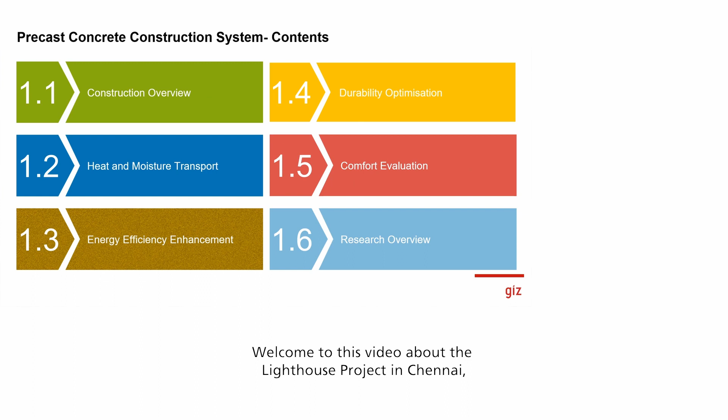Welcome to this video about the Lighthouse project at Chennai, where we discuss the energy efficiency enhancement measurements for the precast concrete construction system. I will show you some background about energy efficiency itself, go deeper into energy demand balancing, and show you the steps to reducing the energy demand in that special construction.

I would like to start with the first step, the basics of energy efficiency in buildings. The core basic is the definition of efficiency. What is efficiency and what are we looking at? One common definition is: achieving the best possible benefit with the least possible effort.

In the building context, we use some principles of energy efficiency in building design, which you can see on the right-hand side in this graph. In the red squares, you can see different climate areas, from the Arctic over the Mediterranean, hot and humid, hot, and outer space.

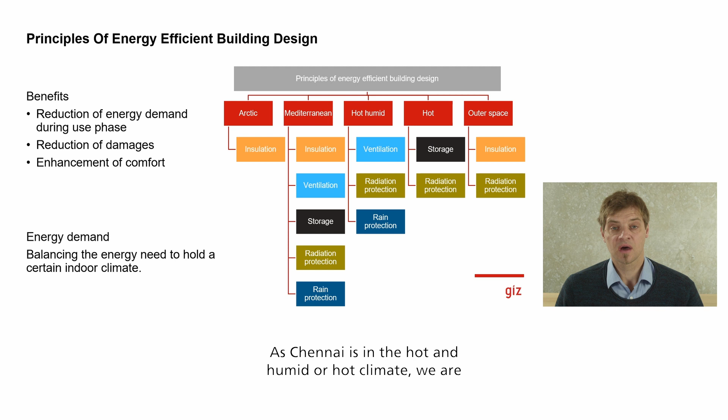As Chennai is in the hot, humid climate, we are looking firstly at these aspects. Firstly, I say, because it's not just this—it could also be other aspects, for example insulation or radiation protection as mentioned before.

By doing that, we try to gather the benefits coming out of the energy efficiency measures we have. First of all, it's the reduction of energy demand during the use phase. We will reduce the energy demand for the building to enhance or stay within the same comfort level.

This could also lead to an enhancement of the comfort level, as you can see in the benefits on the left-hand side, covered in another video. This mostly also leads into the reduction of damages, which is also covered in another video.

So in this video, we are going into the reduction of the energy demand during the use phase, which means we have to look into the energy demand. So what is energy demand?

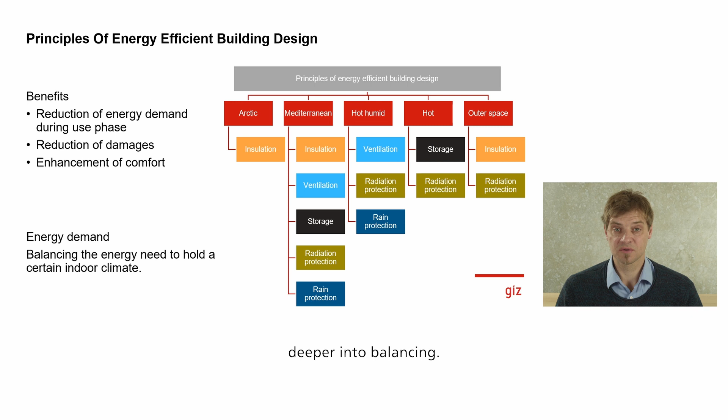The energy demand is the balancing of the energy needed to hold a certain indoor climate. So the indoor climate is fixed, and we would like to reduce the energy we need in order to hold that indoor climate. We have to look deeper into balancing—what is balancing and how do we balance the energy demand for a building?

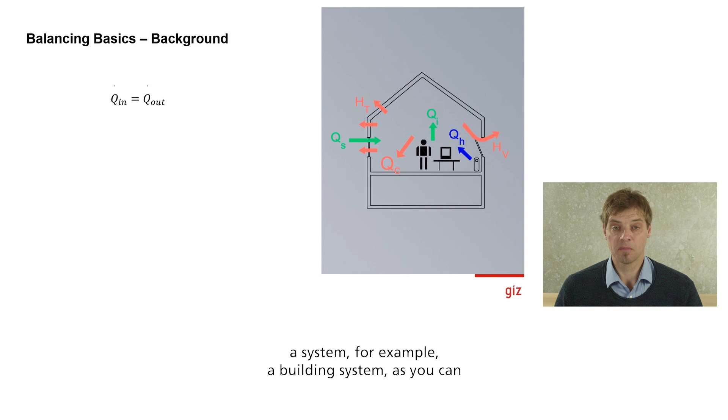We can do that in different ways, and the simplest way is what I have brought to you, so you can use that in your day-to-day work. The balancing background is always that we look at a system, for example a building system, as you can see on the right-hand side, and we balance all the incoming energy, all the sources, with all the outgoing energy, all the sinks, as we call them.

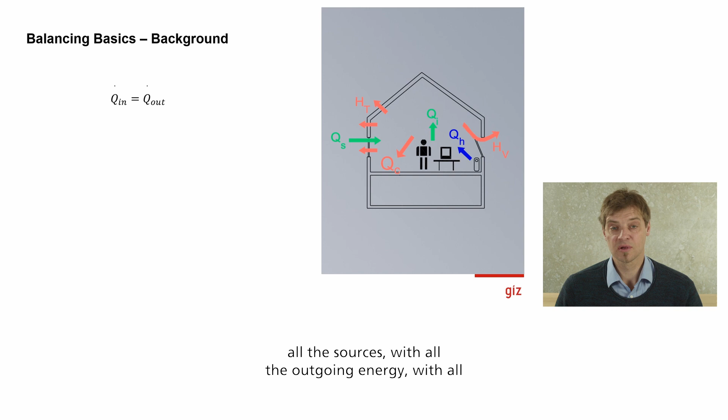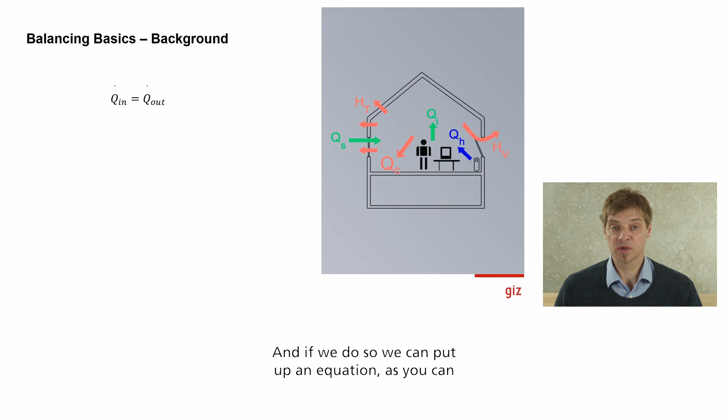As you can see on the right-hand side, there are a lot of arrows pointing from the outside to the inside, or from the inside to the inside, or from the inside to the outside. This is what we want to balance. If we do so, we can put up an equation, as you can see here, and say what the sinks and the sources are, in our case.

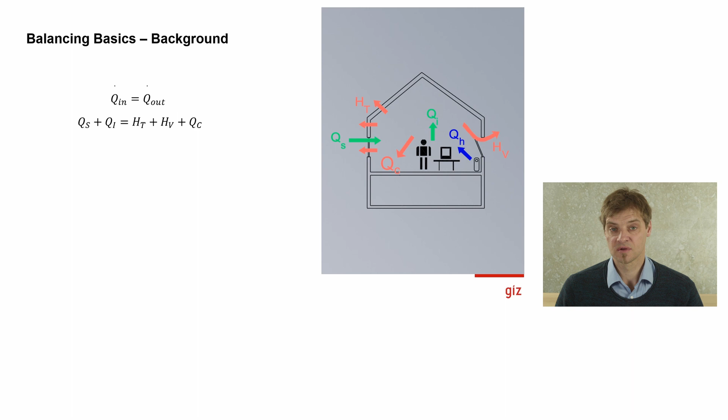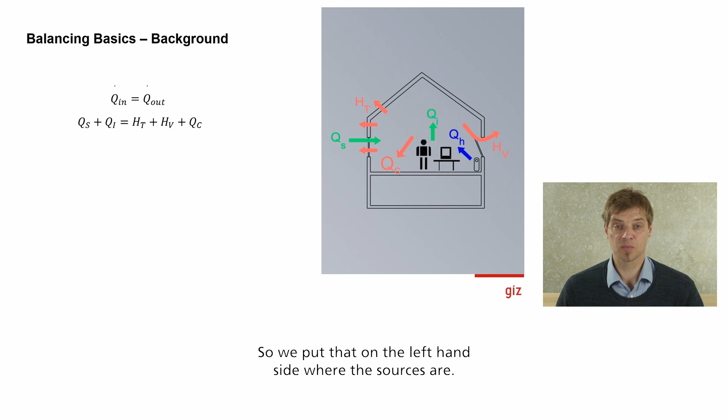Starting with the sources, you can see in your premise, in Chennai, solar gain is definitely a source, coming from the outside to the inside. So we put that on the left-hand side where the sources are.

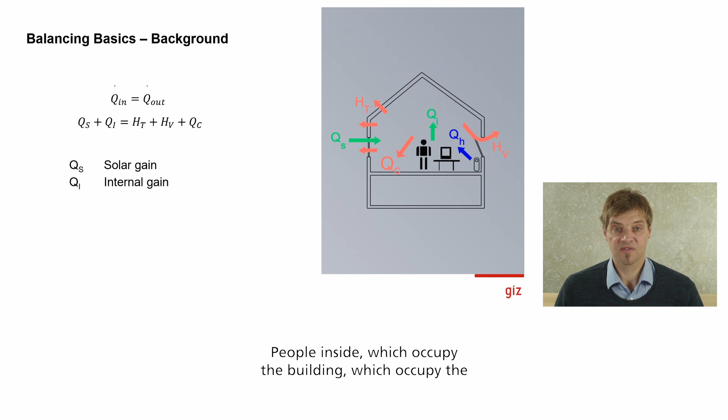Then the second one is also the internal gains. People inside which occupy the building, which occupy the flat that we are looking at, but also the technical devices that are inside, TV, screens, computers, lighting, heating from other sources. And these are also sources because they bring in some energy to the system.

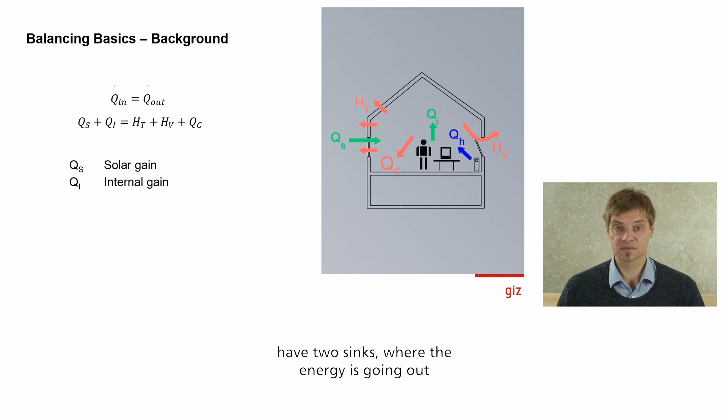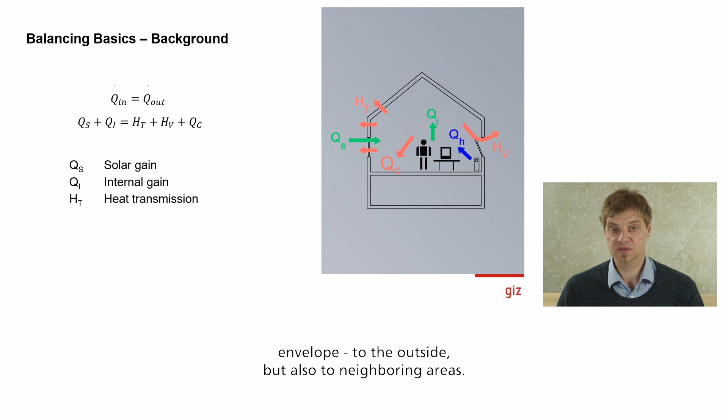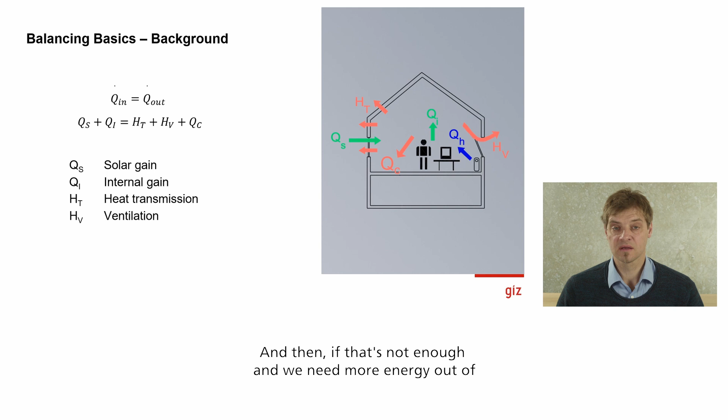And then on the other hand side, we do have the sinks, where the energy is going out from the system. One of the sinks could be the heat transmission through the envelope somewhere to the outside, but also to neighboring areas. The second thing could be the ventilation. If we exchange the air from the inside to the outside or to other spaces within the area, it is a heat sink. And then, if that's not enough and we need more energy out of the system, we can also add here the cooling demand.

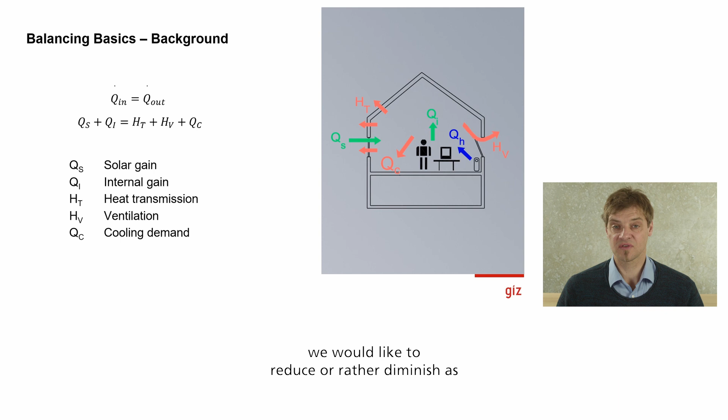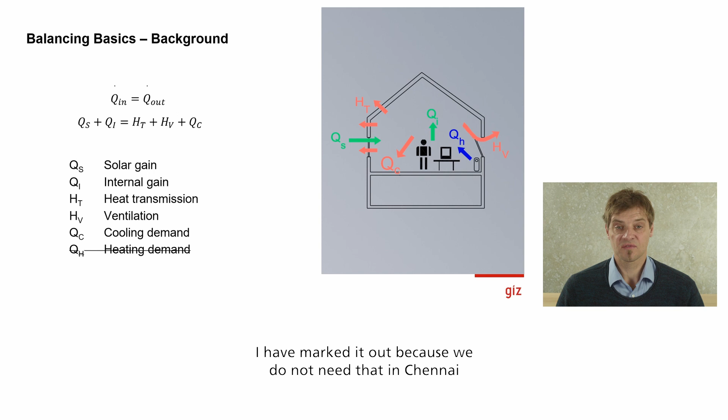This cooling demand in the end will be the energy demand that we would like to diminish as far as possible. If you look at the right hand side, you can also see one arrow pointing from a radiator to the inside. This is the heating demand. I have marked that out because we do not need that in Chennai in the balance. If we have to put it into the balance, it's also a source, which is then on the left side.

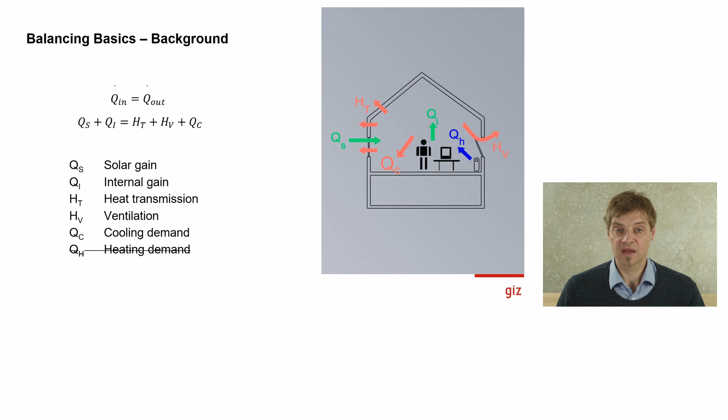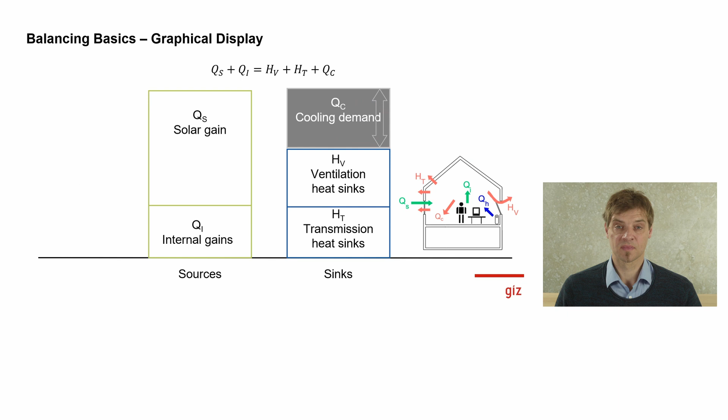On the right hand side, on the sink side, we see the heat transmission sinks and the ventilation sinks add up. But we see there is still a gap between the left sources column and the right sink column. And this gap is then to be reduced or to be added by the cooling demand. This would be the cooling demand that we need for this balancing example. And this is the energy that we have to put into the system or that we have to evacuate out of the system in order to have a balanced temperature within that room. So far for the balancing basics and the theoretical areas.

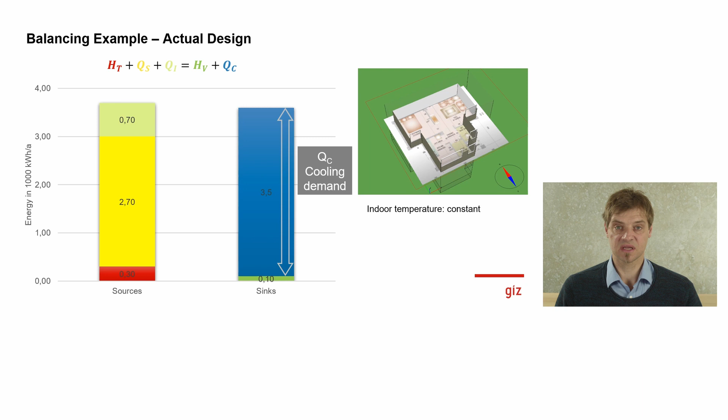Let's move forward to your special area, to your Chennai area where you build the flats and how to really reduce the energy demand for cooling there. What I have done here is making an example for you. You can see on the right hand side the flat that I've introduced and that I've looked at. One flat which is singled out, and for that flat I have added all the balancing examples that you can see, or the balancing equation that you can see above the columns that we have. It's the same as we have seen before.

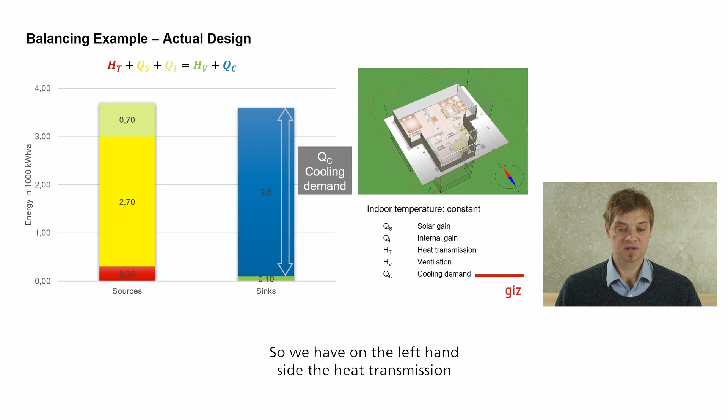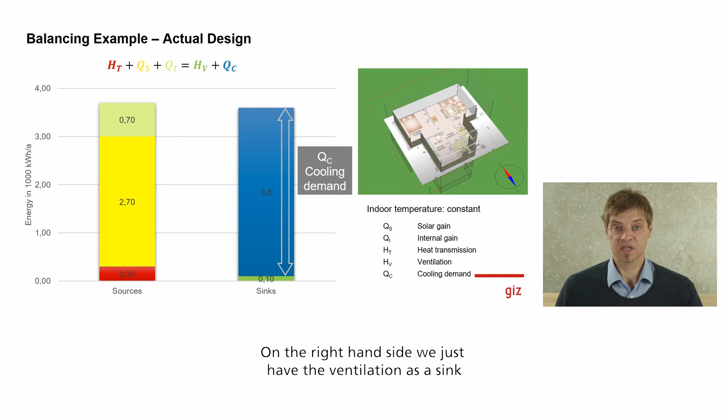So we have on the left hand side the heat transmission as a source. We have the solar gains as a source, and we have the internal gains as a source, which builds the source column. On the right hand side we just have the ventilation as a sink, and all the other energy has to come from the cooling demand. So we have a quite high cooling demand on the sink side. If we look at that, the next step would be to say, okay, what is the main source that we have and how to reduce this source?

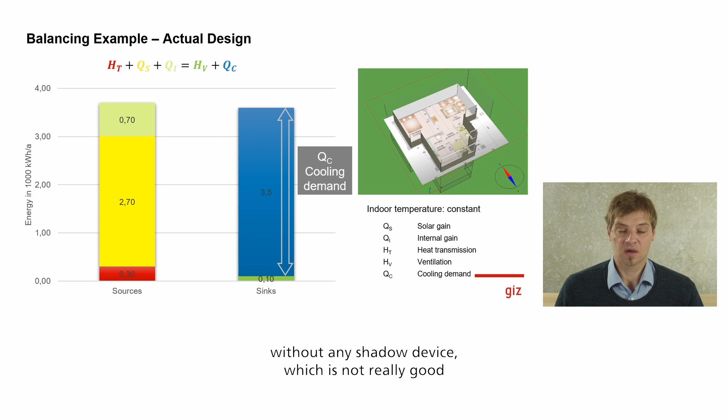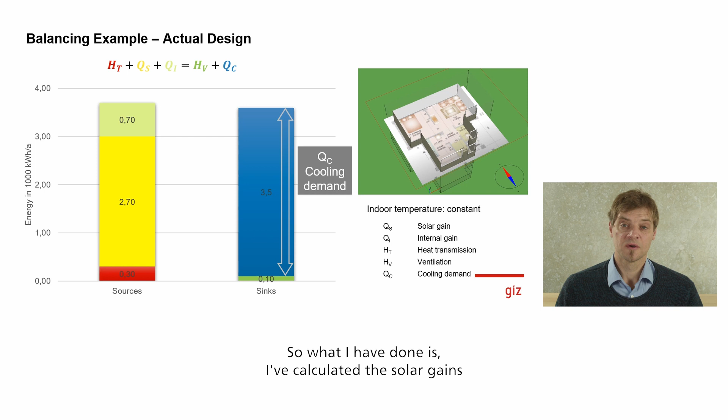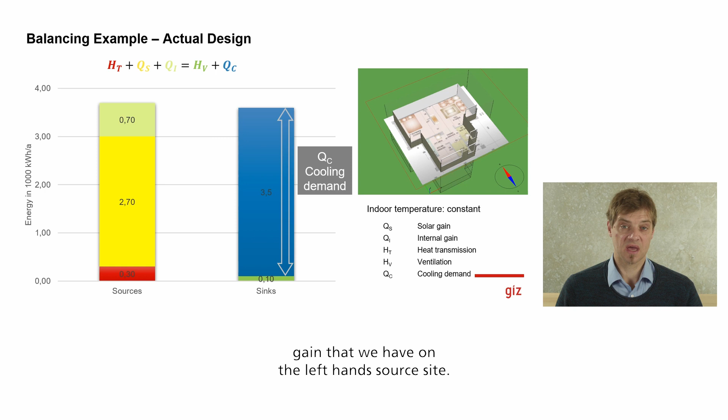In this example, I have calculated the solar gains without any shadowing device, which is not really good for that area, but to show you what is happening, this is the best way. So what I have done is I've calculated the solar gains without external blinds, for example. But we could introduce these external blinds in order to diminish the solar gain that we have on the left-hand source side. And if we do that, we can recalculate all the areas that we have, all the sources and all the sinks, and we will see what happens then to the cooling demand.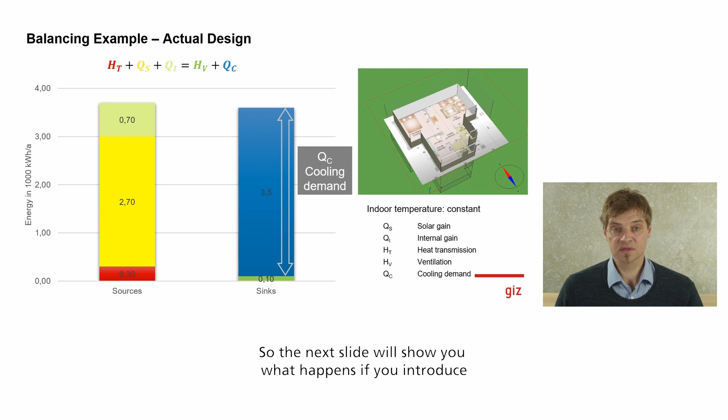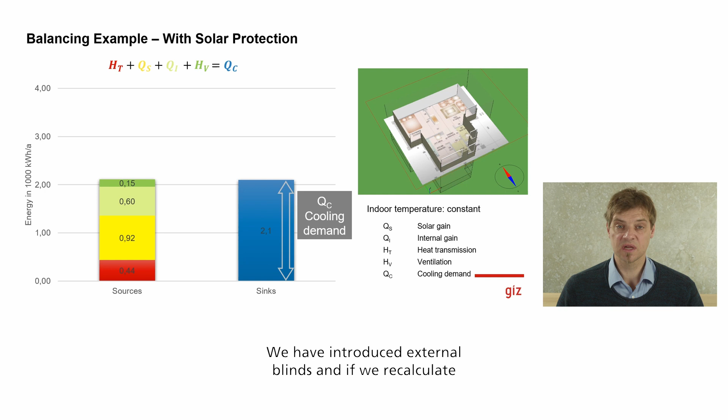So the next slide will show you what happens if you introduce external blinds and recalculate the solar gain that you have then. And I can show you like here, it's again the same balancing equation. It changes a little bit because we changed the solar radiation. We have introduced external blinds, and if we recalculate all the sinks and sources, we will see that now also the ventilation is a source.

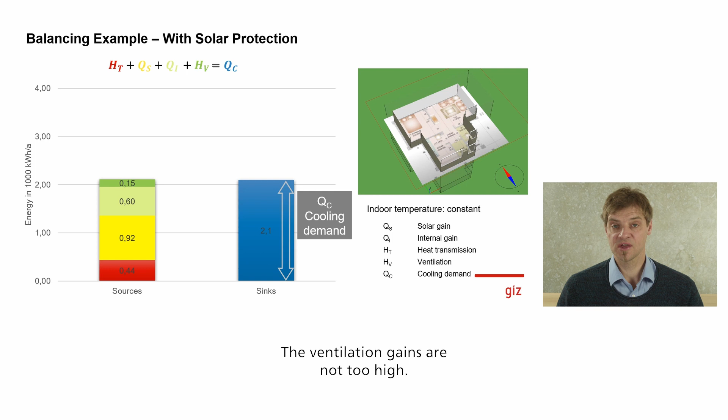What we see in addition is that the transmission is a quite high source, but not the highest one. It's the third one in the line. Then we see that still the solar gains are quite high, and also the internal gains are quite high. The ventilation gains are not too high, so we will not look at that. But what we see on the right hand side is that the cooling demand is diminished by almost 40%.

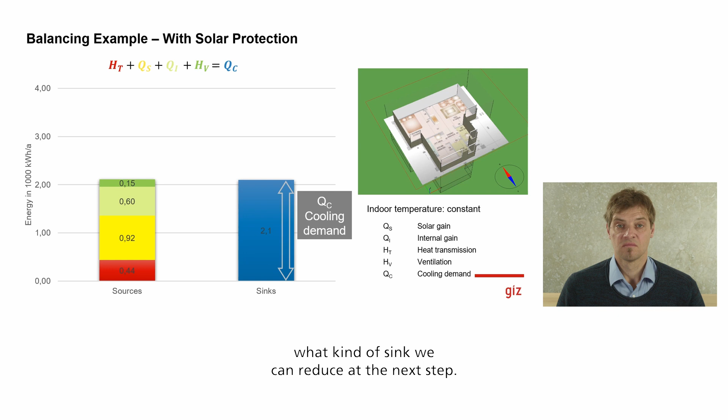So by just looking at the balance and reducing the solar gain, we have enhanced the energy efficiency by 40%. The next step now would be to look at the sinks again and see what kind of sink we can reduce at the next step. If we go through it, we could think of reducing the solar gains again. This would mean that we reduce, for example, the window size or other aspects of the window so that we can reduce the energy from the solar gains. Sometimes this is not possible, so we leave that as it is.

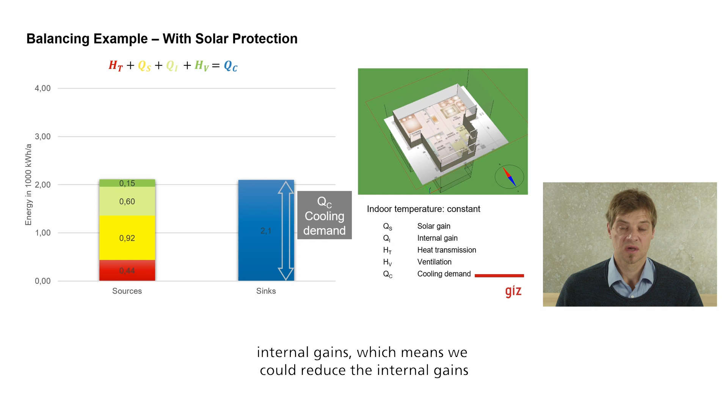Also, the next main source is the internal gains, which means we could reduce the internal gains by allowing just one person into that room or something like that. This is not very practical because we cannot say that in a flat there can just be one person inside. So we cannot do anything about that.

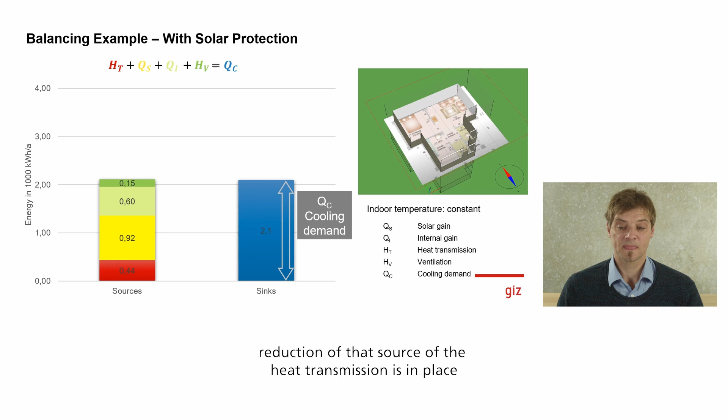But we could look at the heat transmission. In that area, the heat transmission, we do have a lot of energy coming from the heat bridges. The heat bridges are explained in another video, but there could be a high potential in reducing them. And then we would recalculate what's happening if the reduction of that source of the heat transmission is in place and what kind of energy efficiency enhancement we gain then at the cooling demand.

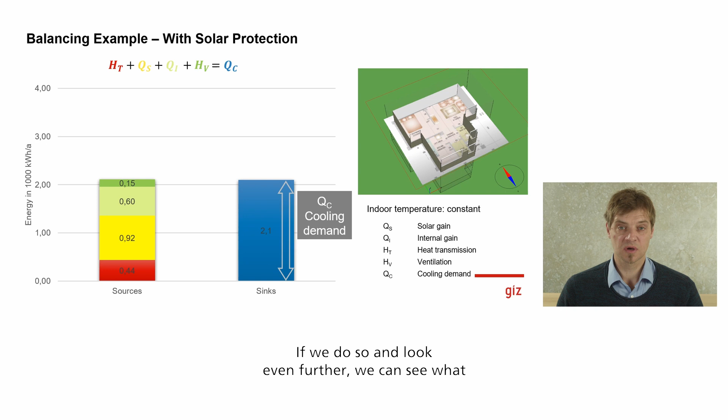If we do so and look even further, we can see what kind of energy efficiency enhancement for that precast concrete construction in Chennai is in place. I summed it up for you. So first, we have reduced the solar gains. This means the cooling demand is reduced by about 40%, so the energy efficiency is enhanced by around 40%. If we do the next step, as I indicated before, and look into the heat bridges, insulate them or do other things to reduce the heat bridges, we can further reduce the energy demand by around 28%. So we have again introduced an energy efficiency measure of 28%.